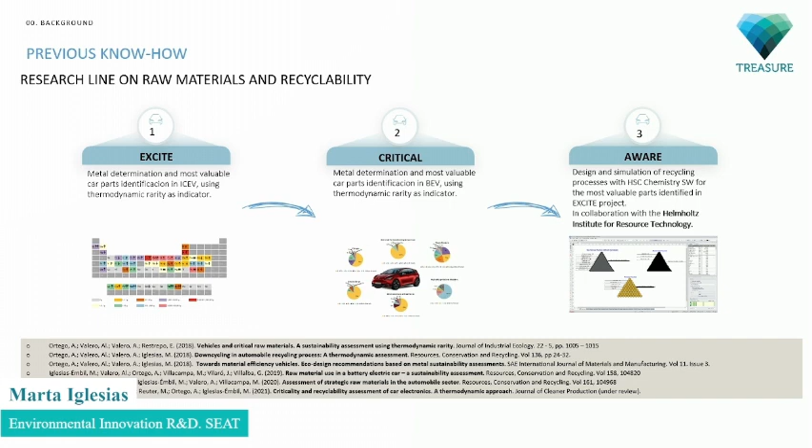We started in 2017 with the Excite project, and we wanted to know what was the composition of a car. There was little literature regarding the material composition of cars. And when I met Alicia for the first time, and she explained to me the methodology based on the exergy property, we fell in love, because we had an indicator for assessing criticality of resources.

We had several advantages, because in terms of mass, we cannot compare iron and lithium, it becomes clear. And in terms of price, there's a lot of arbitrariness and volatility. So when we found this indicator based on exergy, we could tackle this criticality assessment in a proper way. There are several research articles in several journals supporting this methodology.

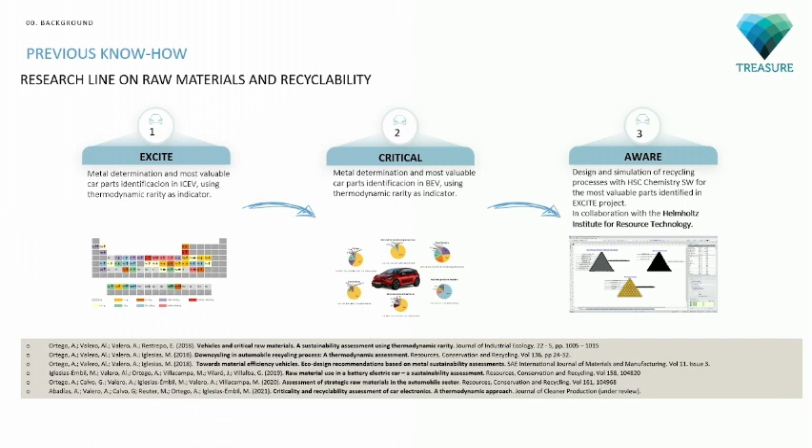One of the important conclusions is that a car is composed of around 50 metals and metalloids of the periodic table. So someone said that the car is a mine on wheels, in fact. Here we have a comparison between a combustion car and an electric one, and you can see that with the electrification of the car, almost all 35 metals of the periodic table are increasing their quantity in the electric car.

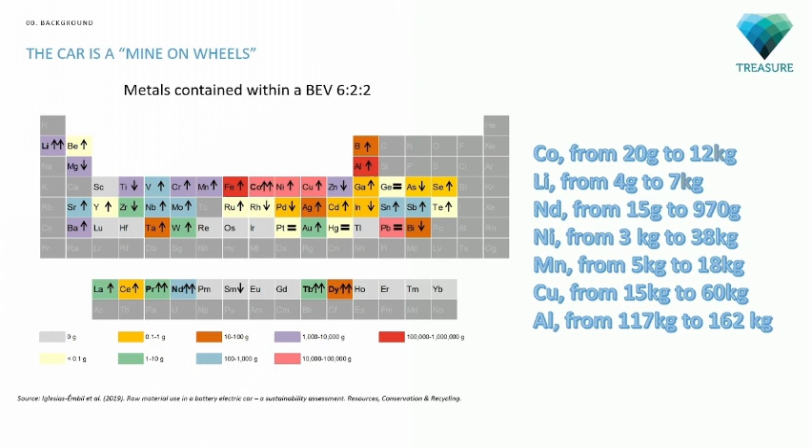We know that cobalt and lithium have an enormous presence in electric cars, but we are moving from orders of magnitude of grams - in the case of cobalt, a combustion car has 20 grams, but in an electric one we are calculating 12 kilograms of cobalt. So this is a huge, exponential increase. But this is not the case only for rare metals, but also for base metals such as copper, which is multiplying by 4 its quantity, from 15 kilograms to 60 kilograms.

So that was the basis for our ongoing projects that we are very proud of. Of course, Treasure, which we are presenting here today. And also, we are working on Eclipse and Reload, Spanish government-funded projects, where we are tackling other material fractions, such as plastics and key components of electric cars.

I will skip this, because Paolo already introduced it. But in Treasure, we are mainly involved in the criticality, disassemblability, and recyclability assessments.

Focusing on the criticality, which we led from SEAT, we made the exercise of trying to identify the critical metals and the car parts containing them. We performed it with a methodology developed by the University of Zaragoza, using a rarity indicator based on the exergy property, as well as the rarity intensity indicator, because there were some car parts that were light or tiny but contained substantial amounts of rare metals, so it was important to take into account the weight of the car part.

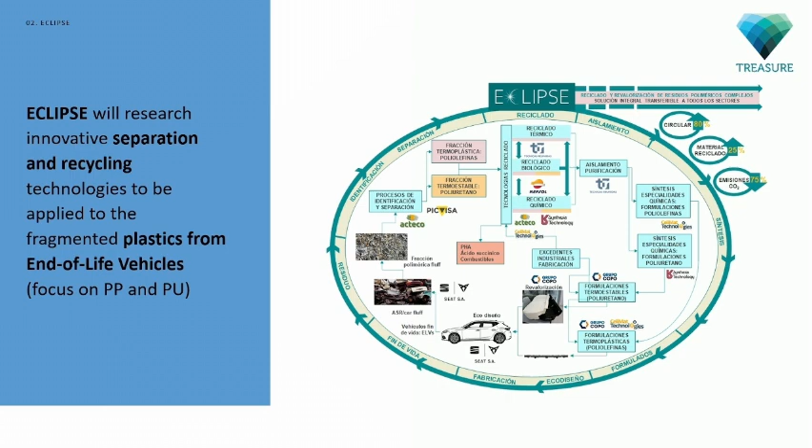Preliminary results are shown here. There's little literature about the plastic composition of cars. As you can observe, cars contain around 17% plastics, with a great mixology of plastics - around 40 types categorized in 20 different families. This is challenging for the recycling processes and recovery. The most common one, as expected, is polypropylene with 18%, but polyurethane and polyethylene also have relevant quantities.

Once we identified all the composition of the car parts, we developed this list of critical car parts, taking into account the weight of the car part - parts that weigh more than 1 kilogram and contain more than 80% plastic content. Making this selection, we were able to select the critical car parts representing almost 50% of the weight of the plastic composition of the car. And for sure, we detected the bumpers, the dashboard, and the fuel tank, for example, which are heavy plastic parts.

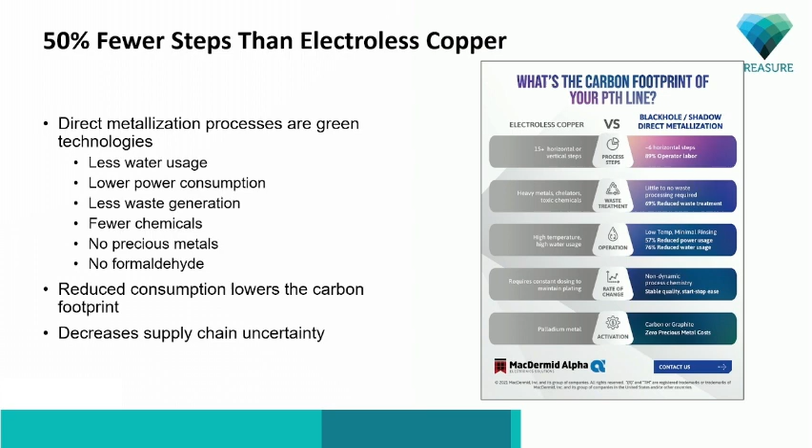So why is it important, and what are the barriers? Well, the barriers quite often in the automotive industry are change, the fear of change. People don't like to do new processes because this is what we've done for 30 years, it's proven technology. I think with the sustainability goals, what's happened is people have reopened their eyes and said, let's think about these technologies and how they can help us achieve some of our different goals. So when we look at direct metallization, carbon-based metallization, there's less water usage, less power consumption, lower waste generation, fewer chemicals, no precious metals, no formaldehyde in the process. It sounds like, and I'll use the American basketball term, a slam dunk. It sounds like something you would just switch to straight away. But at the moment, we're really trying to promote this technology because it has a big impact.

Now, we actually have two different technologies. My company, MacDermid Alpha and MacDermid Enthone, is a combination of a number of companies which came together in 2015. So both Enthone and MacDermid brands had two different parts.

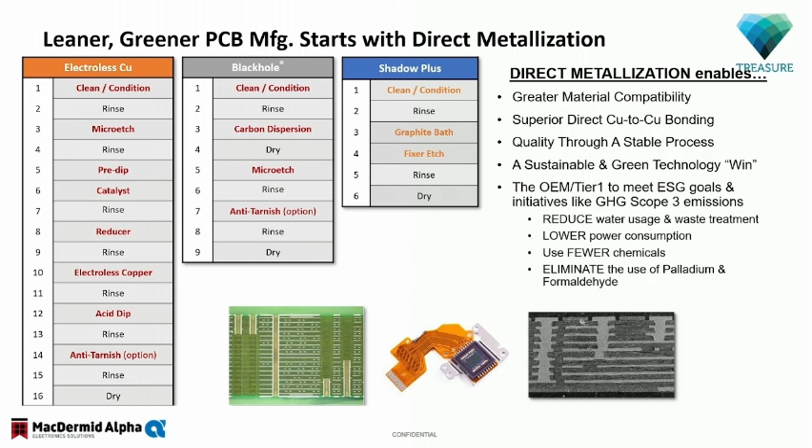All you need to know here, and what's key, is that on the left-hand side is the electroless copper process. You can see 16 steps in that whole process. So imagine the PCB production line. When we go to either our Blackhole or Shadow Plus type technology, we reduce those number of steps very significantly to achieve the same result, a metallized copper hole. So what we see is a big reduction in chemical consumption and waste treatment.

From our perspective as a material supplier, we actually supply less material in the carbon-based technologies, but we're committed to promoting these sustainable technologies through the PCB supply chain. So we look at different areas here. The amount of wastewater, the amount of chemical replenishment, all has a massive amount of saving in that whole process for the whole piece.

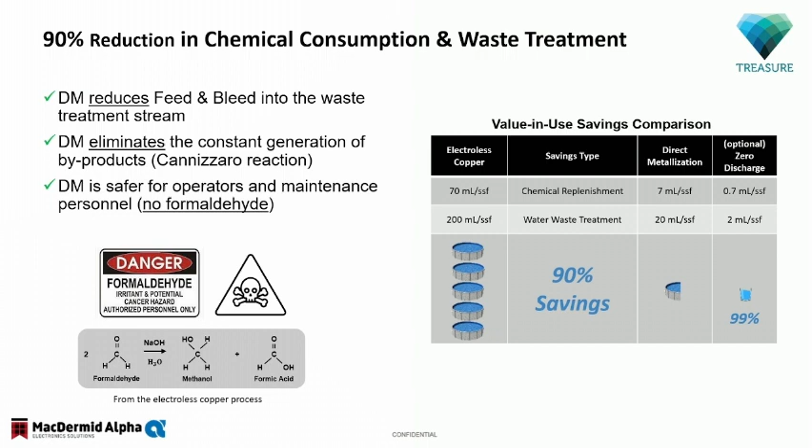We really think about this in 4 sections, and when we get asked questions about sustainability, we're very aware that there are lots of components to the word sustainability. It means many different things. So we really look at things such as power consumption, waste treatment, water usage, and also the energy used in the actual manufacturing process itself. How much energy is consumed in every square meter of printed circuit board used today.

A few of the other speakers have noted that if we look at the car, Marta called it the mine on wheels, some people call it a computer on wheels. The key thing is now we know there's somewhere between 60 and 100 PCBs in most cars we see on the road today. So in terms of square meters of PCB per car, it's got much larger, but also the number of layers of the PCB has gone up in a big way because of the complexity of the electronics.

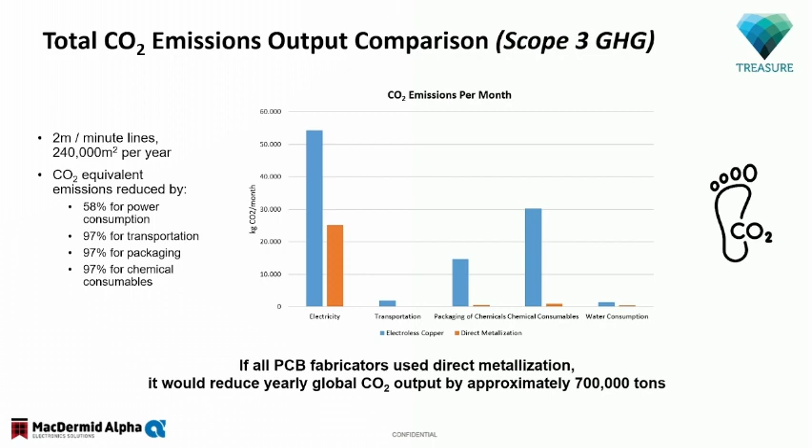So if we look at the CO2 comparison between the different technologies, we can see all of these have been mapped. I'm not going to go through them all now, but we're seeing very big savings in much of the energy and water consumption in all these different processes for fabrication, in regard to scope 3 and greenhouse gases. So what we've put together for our supply chain is a tool to try to measure the comparative differences. How this works in the industry is we need commitment throughout the supply chain, typically.

I think most of you will know that the majority of PCBs fabricated today are fabricated in Asia, largely in China. A lot of assembly happens in Europe, a lot of assembly happens in Americas, it happens all over the world, but the base PCB that companies like Bosch or Continental will build in Stuttgart or in Reutlingen or anywhere around Europe has actually been shipped from Asia typically. So to get the supply chain to move, we absolutely need to encourage through the whole supply chain, from governments, through OEMs, through the tiers, to show what impact these things could have.

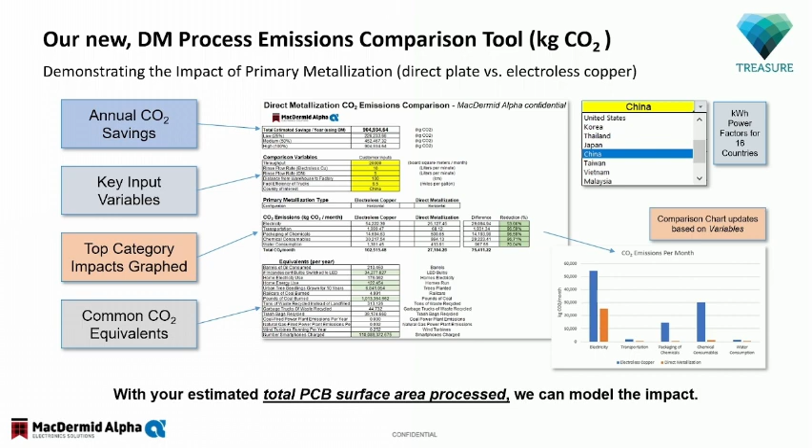So this is just an example of a tool which shows the amount of CO2 savings, for example. It's one of the tools we can have by switching from electroless copper metallization of PCBs to carbon-based technologies.

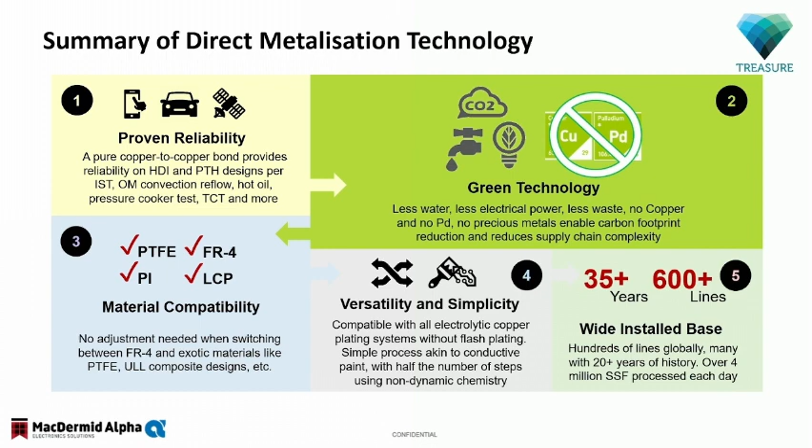So if we look at a summary of direct metallization: proven reliability, it's a much greener technology compared to what we have today. There's a great level of material compatibility, and there's quite a wide installed base, but one of the industries which has resisted the change has been the automotive industry, because it's a newer technology in many cases.

So that's the first section of my very brief presentation, and we're happy to have further conversations on any of these. So we're going to move on now.

So we've bought the printed circuit board, we've purchased all of the components for our design, and we have to assemble them. We have to make a functional circuit. So if we look at that, how can we reduce, for example, CO2 emissions in PCB assembly? Well, we can reduce the process time, how fast we can process the materials. We can reduce process temperatures. We can eliminate process steps.

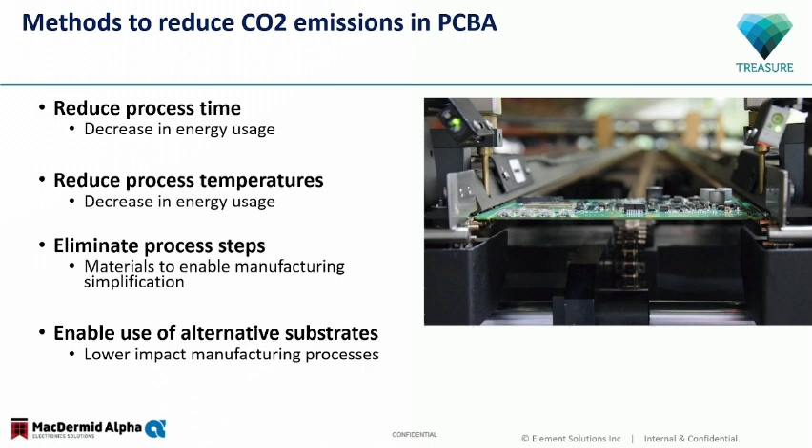So quite often in a PCB assembly in the past, we would print some solder paste, place components, put it through a furnace, put through-hole components on, pass it over a wave solder machine. There are ways to cut out certain processes, and to enable the use of alternative substrates, so we can use different process temperatures and settings.

We get a lot of questions from our direct customers, the big tier one suppliers, about how much energy is consumed in the production of our materials. For example, we'll ship a tube of 1 kilogram of solder paste, a printable form of solder, to an assembly line, and we've got calculations on how much energy is consumed in manufacturing that product. The reality is it's a very small percentage compared to the energy consumed processing this material at our customers' plants. So our bigger impact on sustainability is making materials they can process more efficiently, impacting their own energy consumption.

A good example: if we sell 1 kilogram of solder paste to someone making an engine control unit, typically there'll be about 2 grams of this material on every PCB. So you're going to make about 500 PCBs out of this 1 kilogram. You put 80 PCBs through the oven every hour, and the line power consumption through the furnace is 25 kilowatts per hour. That 1 kilogram of solder paste will last 6.25 hours, so you'll consume 156 kilowatts of energy just to process this material. In comparison, we think it's about 3 kilowatts of energy to produce the material in the first place.

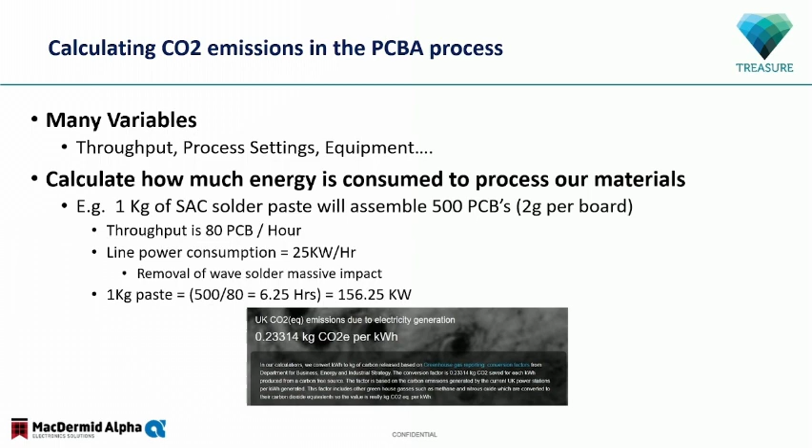So how do we get the big impact on that?

The first one is the use of lower temperature solders. In 2006, we moved from tin-lead solders to lead-free solders, and that increased energy consumption very significantly in assembly processes. That's something we can review and look at many times. But what we're looking at here is the ability to use materials that remove a number of steps, so reflow and wave soldering can become one single process because components can cope with lower temperatures. Also, the reliability of these materials has been improved through metallurgical dopants over the last few years.

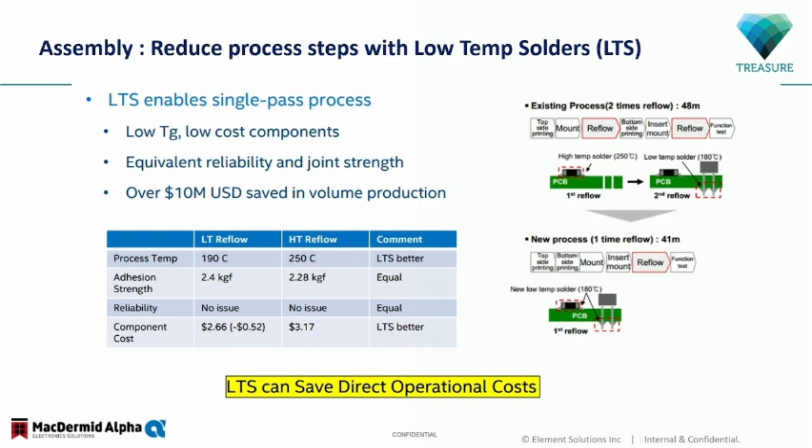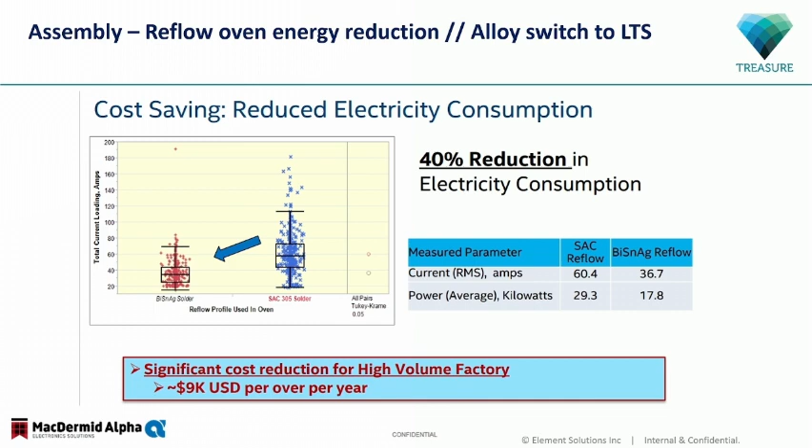Looking at an example of energy used in a reflow system: this is the heat process where we print the solder paste, place the components, and pass it through a multi-stage furnace, a high temperature process. Typically we're seeing about a 40% reduction in energy consumption going from a standard tin-silver-copper, SAC alloy, to a bismuth-tin-silver alloy, which melts at a much lower temperature. You can see the power consumed in the oven is 29.3 in this example, versus 17.8 kilowatts per hour for the same process using the lower temperature alloy.

If you can't remove this process, one way is to use nitrogen in the tunnel, which reduces wastage of material very significantly because of the lack of oxidation and greater performance of the material overall. It has a small impact, we still recommend removing the process entirely, but it still exists in some cases for large connectors.

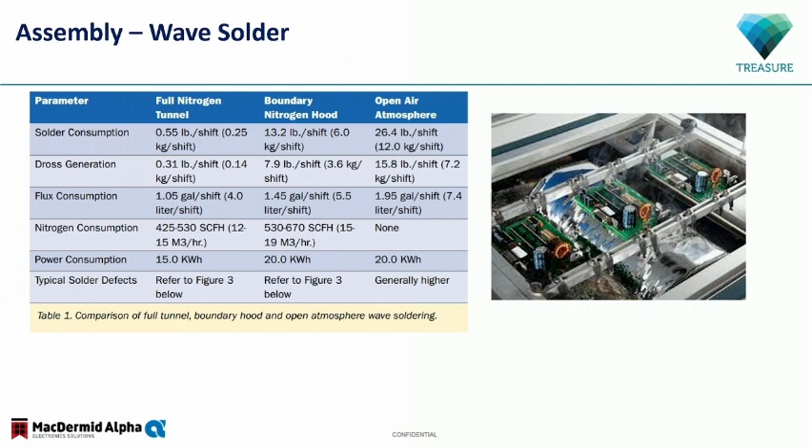So the alternative to wave soldering is... what happened? I pressed the wrong button, that's what happened.

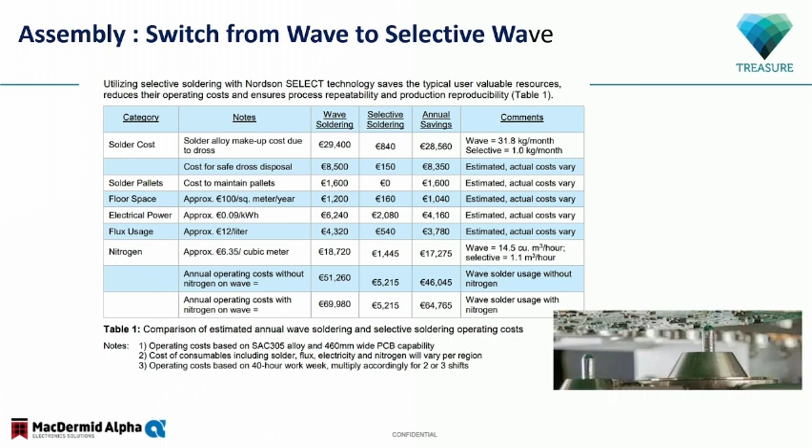The alternative is selective soldering. Instead of having a 500 kilo bulk of material heated to 260 degrees and pumped to make a few grams of solder joints, this is a selective process where the PCB is moved up and down over a small nozzle of molten material, with a flux material applied again. This table shows the impact on cost and material consumption in the assembly process. That's everything from me.

It's a very quick sketch through some of the ideas and materials we have. I think the key message for this audience is there are decisions that can be made today on process choices which have a big impact on material consumption, energy consumption, water consumption, and waste chemicals from different processes. Thank you very much.

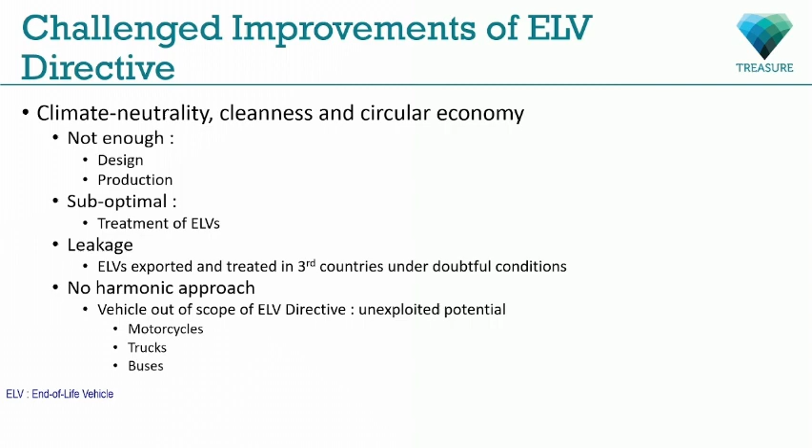Circularity is important, and this is part of the type approval of the vehicle—type approval meaning it's considered at the production, design, and production phase of the vehicle. But more important is that we keep resources here in Europe in order to guarantee that we can further extend our mobility. So management of the ELVs itself is more focused, and the export of used parts is being better controlled based on that regulation.

Keeping resources again is one of the focuses, and management of ELVs is controlled, meaning avoiding that ELVs are exported, and making sure they are treated here in Europe.

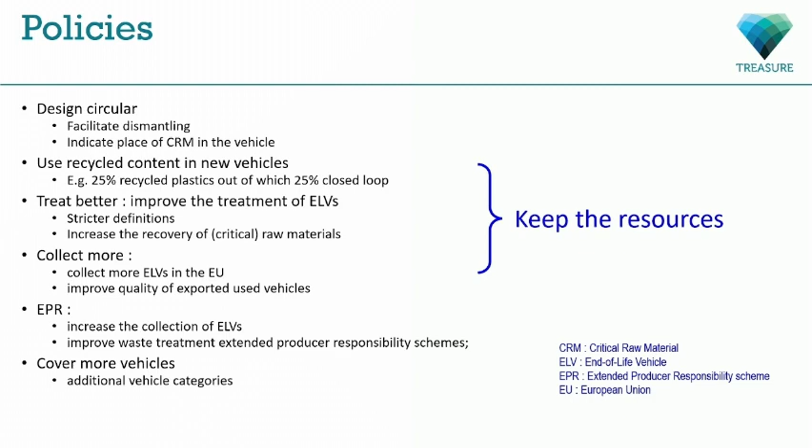We have some other elements here, the extended producer responsibility, and the intention to cover more vehicles as such. More stringent definitions are quite important here.

It focuses on reuse, meaning using parts for replacing parts. Recycling, in my understanding, means that the material is being reused as almost the same material, and recovery, as defined here, means the material is being regenerated as another material, not intended for incineration. So these are the definitions.

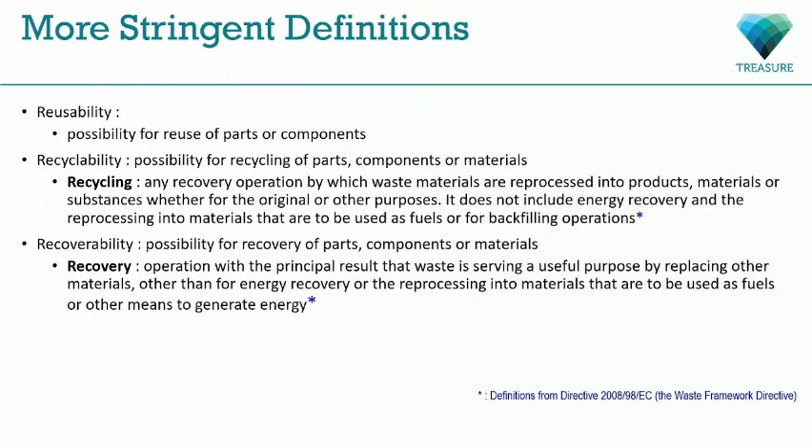These are the definitions for which the car manufacturer has to make sure that his vehicle is 85% reusable and recyclable, and 95% reusable, recyclable, and recoverable. This is not only for the car, it's also for motorcycles, buses, and so on.

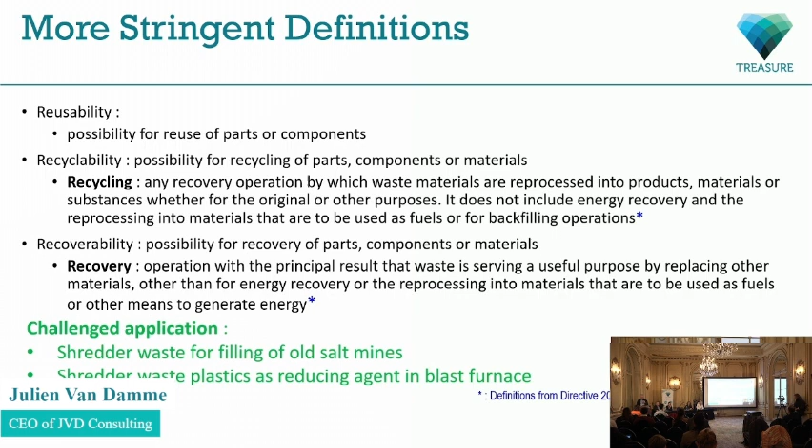What are the challenged applications which are considered by some countries as being recycled? That's shredder waste sent to old salt mines for stabilizing the salt mines, and also the use of plastics coming out of the shredder process as a reducing agent in blast furnaces. These two applications are not really covered by the definitions I have just shown.

So minimum recycled content is also important. We start with 25% recycled post-consumer plastics, because I know from my colleagues in the car industry that production waste that is just shredded and put back into production was also considered as being recycled. Here it's really specified: it must be post-consumer plastics, out of which another 25% should come from a closed loop process.

This is, I think, the most important thing. Other elements like proof of recycled steel and recycled other metals are still subject to further analysis and will be made obligatory in a later phase.

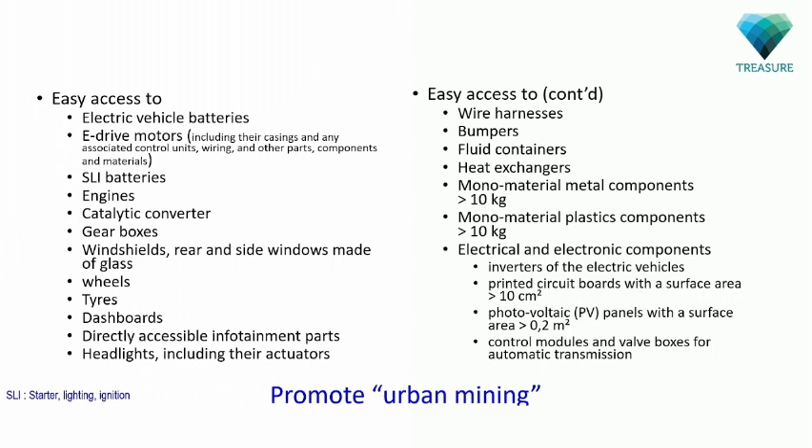There is one exception: if it can be proved that the materials can be retrieved from post-shredder technology, that's also allowed. But here, at first instance, they want to make sure that the elements are there.

Another element in the directive is design elements, and what is important there is that they want the materials and parts to also be removed as easily as possible. Basically, this is something that at least the car manufacturers are doing already, because they want to make the work for their dealers as easy as possible. But this is also contributing to the dismantling possibilities of a car.

So this removal and replacement, at first instance for parts, but also for components, and later on for further treatment, must happen in a non-destructive way. That we already had.

What is also important to see is that there is a kind of vehicle passport required. That means information must be available also for the dismantler in order to promote the dismantling of parts and components so that they can be reused for further operation. Why 7 years? Because this is just an idea and needs further elaboration by the European Commission.

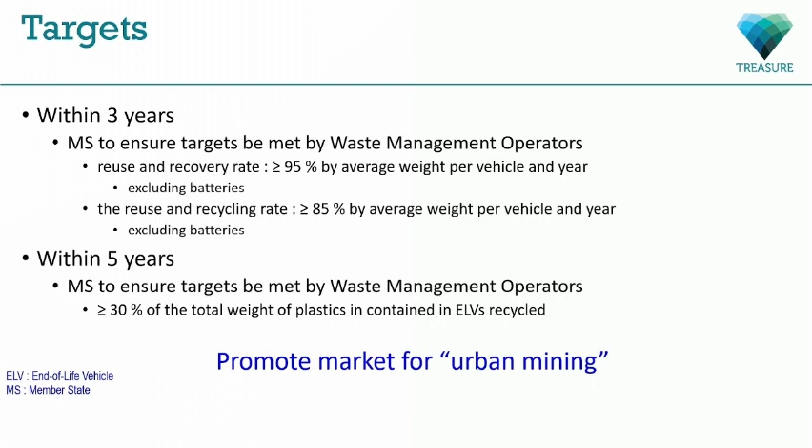There is a definition of used car, and a definition of end-of-life vehicle. End-of-life vehicles cannot be exported anymore; they must be treated in the EU, which is in fact a good thing.

And for that, we have some information to be shared through a system which will be developed by the European Commission, Move Hub. So also there, the target is to avoid losing the materials.

More vehicles has been explained, so more business. More parts and components to be retrieved, more business. More separation, more business, but not for the dismantler, for the shredders. More materials, more material flows to be handled - also an important element for opportunities. And of course, as there are more materials, there is more value as an option. So these are the opportunities, and if there is a deficit, the manufacturer will cover it.